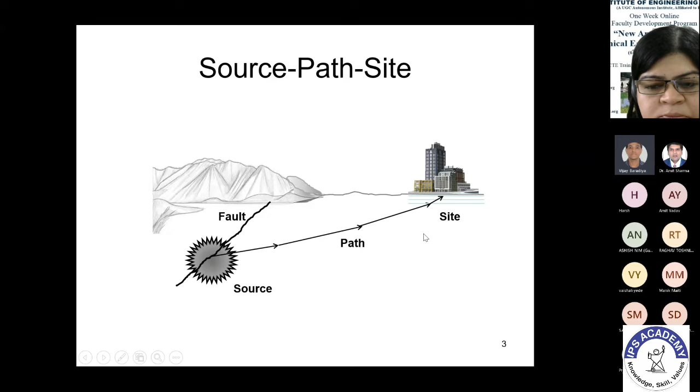Because after that, the overburden will take care of it. So in these local soils, how does the wave get altered? I have source characteristics, path characteristics, and site characteristics. So I have to quantify each one as the wave passes through three different materials. That's what we are going to discuss.

Structures, or whatever you call the built environment, any kind of thing. So let's consider this: assuming 30 kilometers below the ground surface, I have some earthquake or fault rupture, and because of that fault rupture...

Because of that fault rupture, seismic waves are generated, and then those waves pass through and reach the bedrock below the facility, below the structure, and then they move towards the soil, where they have a lot of interaction.

So here, this is the ground response at the bedrock. Whenever there is an earthquake, from the instrumentation or seismographs, we get this ground motion, because most instruments are installed on bedrock. So we get this acceleration or time history at the bedrock, and then we have to bring this to the surface. For that, I need the complete dynamic properties of my substrate.

It also says that even in seismic zone 3 and above, we have to carry out dynamic tests, including MASW, which has become compulsory. When you do this, you get the complete characteristics of your strata.

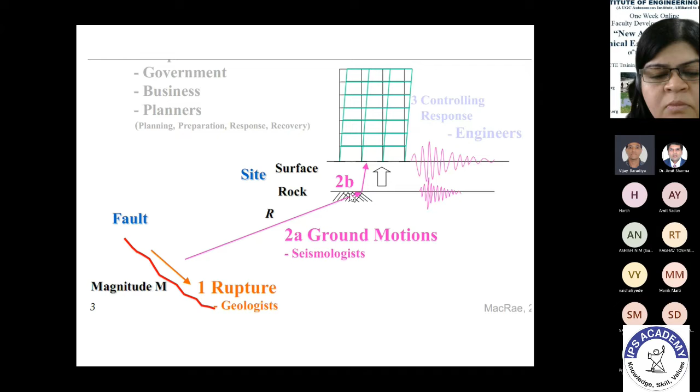As you know, our microzonation map has 4 zones - 2, 3, 4, and 5 - with different levels of risk.

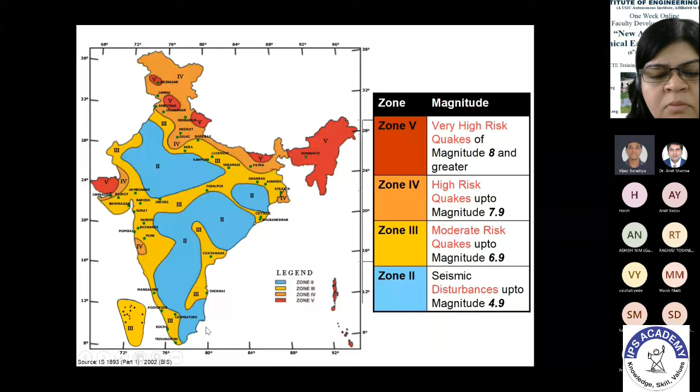This is actually at a macro scale, considering mostly the seismotectonic and geological settings, but not the geotechnical characteristics. So this can be taken only as a base thing, not as a Bible that you go with, because I've given the example of Delhi itself.

As I said, when you have a seismic source passing through, obviously there is the topographic effect. In past case histories, especially during the Nepal earthquake, in the Kathmandu Valley, we saw much higher damage compared to the portions on the hilltop, etc.

This is only because of the topographic effect - the crest part or the depression part, etc. Even the wave has to change with the topography, which we are not considering in this one, which we call local site effects.

If time permits, I'll cover this also today. So primary topographic effects - if you have a complete homogeneous soil, the ground response analysis may be an easier thing, in the sense it will be in a kind of resonance frequency type, using very simple equations.

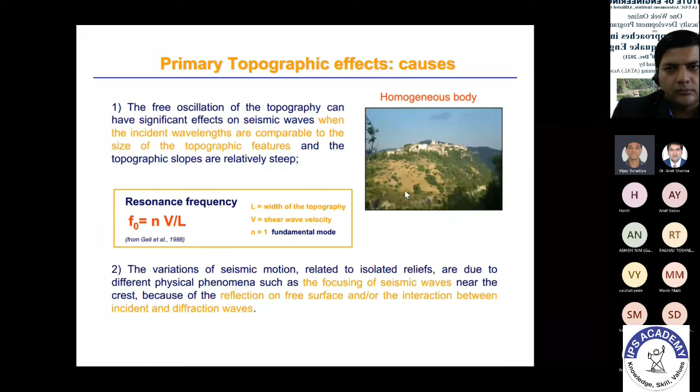Another thing is, with the topography effect, we have another important factor to consider, which is the geometrical factors, which we have to incorporate when we do the ground response analysis.

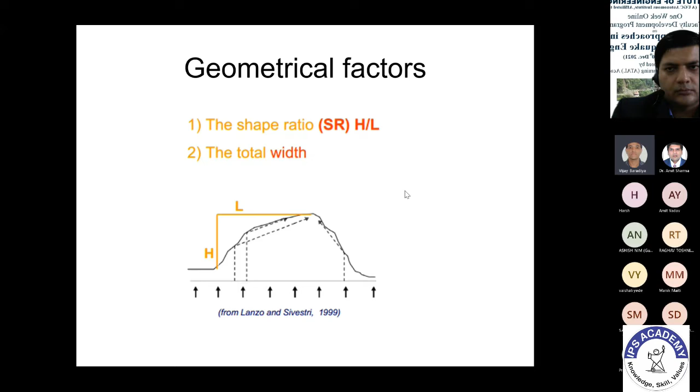Before starting my actual talk, I would like to show you some of the past damages and how they can be quantified, in terms of damage intensity and also the pattern part of it.

Let's see - again taking the example of Delhi. If it's South Delhi, we have a facility sitting mostly on the outcrop, so you find rock. Whereas if it's Eastern Delhi or parts of Central Delhi, you have thick alluvium, and the facility may be sitting on soil.

So why is this? Because the soil is highly site specific. If you want to design for a particular site, you have to understand the behavior of the soil at that particular location. So this is a completely site specific study.

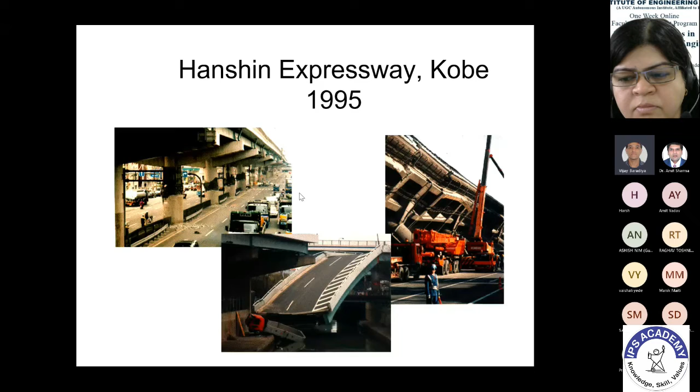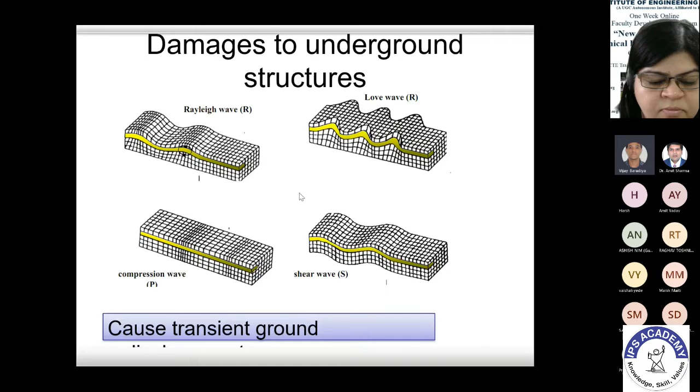Similarly, for underground structures—right now even the Government of India has a lot of ambitious plans for underground tunnels, etc. How do these damages happen?

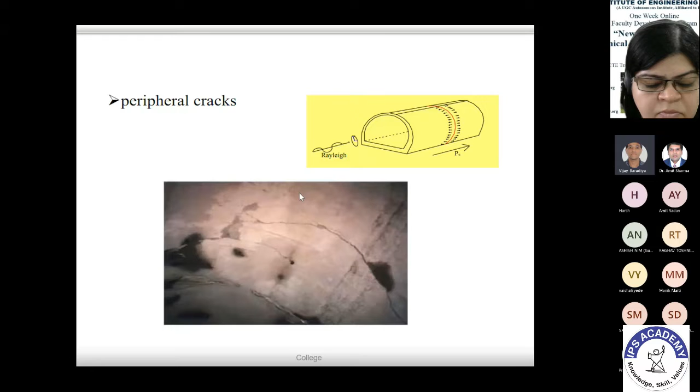I'll show you some photographs, so you can see peripheral cracks. During the Sikkim earthquake, so many Tista projects—their underground caverns, especially the transformer cavern and powerhouse caverns—had completely collapsed. In a few of the caverns, people were working, so men and machinery were lost. It was such a big disaster that happened in several Tista projects.

You can see here the spalling of the concrete, and longitudinal cracks can also develop. This happens when you have wave propagation effects—the direction of wave propagation also matters. All tunnels, especially in the Tista projects—Tista 2, Tista 3, Tista 4, etc.—the damage was not uniform in pattern or intensity.

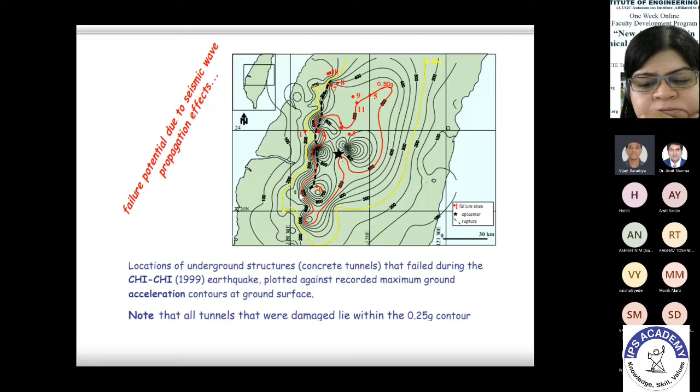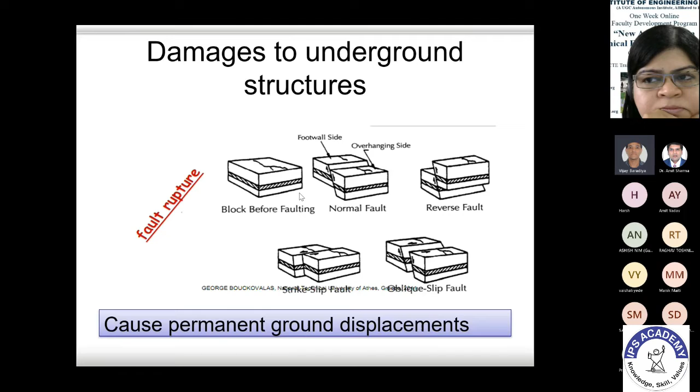This depends highly on the topographical effect and also on local site characteristics. Of course, the damage to underground structures also depends on the rupture mechanism, whether it's a reverse fault mechanism or strike slip fault, etc.

Another hazard we have to handle is liquefaction. I had one interesting consultancy project—it was actually a flyover bridge. They started sometime back in 2014 and designed everything, and started construction as well. But there was a query of liquefaction because it was in seismic zone 4, and since that came out, they wanted to redo the analysis.

When they did the analysis again, yes, it was liquefaction prone. So mitigation measures had to be considered, and the project was delayed for more than 4 years because of this process. Liquefaction is one of the very interesting and complex phenomena we observe, especially during earthquakes.

What happens is the soil behaves like a viscous fluid. Can we imagine standing on such material? No, right? Because it doesn't have any shear strength—it loses shear strength for some time, and then regains it. During this process, your structure may fail completely.

You don't mind if it regains strength after a couple of minutes, but how does that help you? It already liquefied. You can see here there's no fine crack on the superstructure, but it has collapsed. So these are the geotechnical hazards.

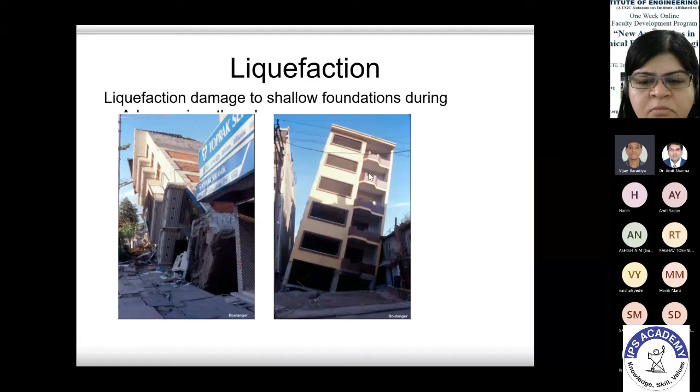Some of the port structures also, I think tomorrow my student will give you a talk on port structures. So Swati, I don't want to do that.

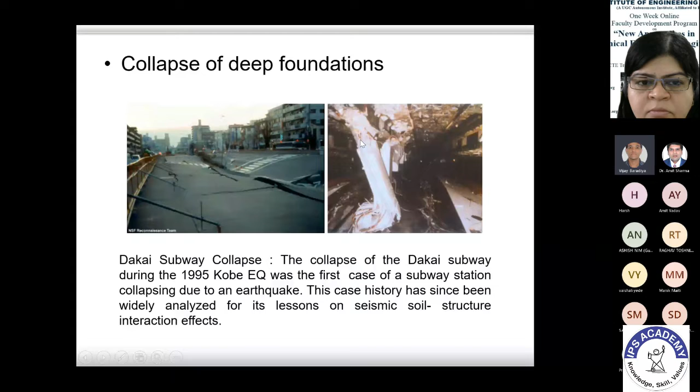When the soil around the pile has washed out, how do we transfer the load? You can see here, this is between the connections, and these are the piles, how they damage. They are now columns. What happened to the embedded soil? It has been washed out because of the lateral spreading.

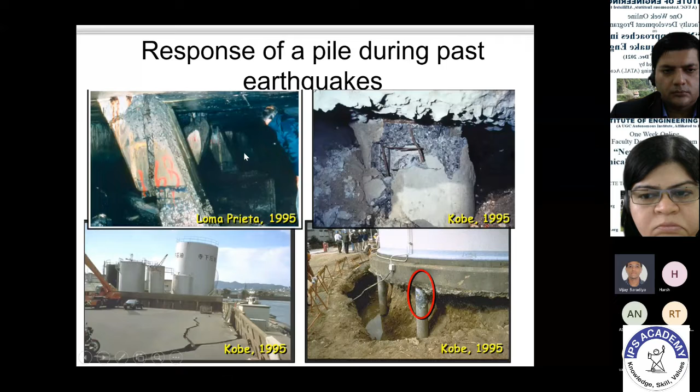Retaining walls, you take any structure, and this is during the Uttarkashi earthquake in 1991. You can see the failures.

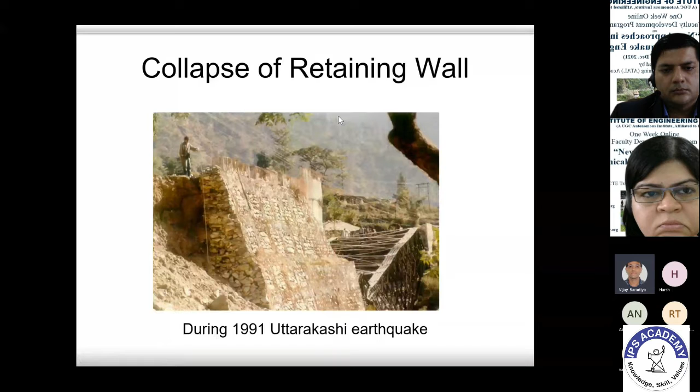So with this, let's see how to quantify that, considering the path effects and also the site effects. For that, you have to carry out the ground response analysis.

First is to quantify the source effects - obviously the rupture mechanism, the type of earthquake, how the earthquake happened, all these things come under the rupture mechanism, the source mechanism. Mostly this is the easiest part. You can get it just after an earthquake or even before an earthquake, since seismologists do a lot of work on such kind of things.

Then the second one is path effects, when a wave is passing through the material, because seismic waves pass for kilometers. When the Bhuj earthquake happened in the Kutch region, it passed through up to Ahmedabad. Ahmedabad had severe damage when compared to the Bhuj region, which is near the epicenter. So why do you think so? Because when a wave is passing through for a longer distance, the energy should die, right?

The laws of physics - but here the laws of physics doesn't apply, because the wave gains energy when it's passing through loose sediments. Ahmedabad, which is almost 200 kilometers away from the epicenter, experienced more damage to buildings than those near the epicenter. This is completely against the laws of physics, so that's where we have to be more focused. Why? Because when a wave passes through loose sediments, it amplifies, which is called soil amplification, and you have to evaluate that too.

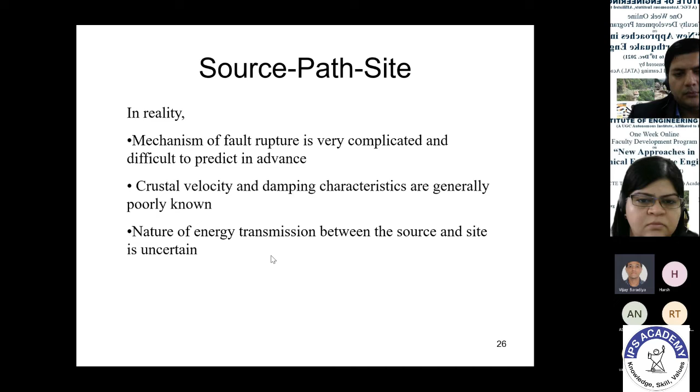So in reality, the mechanism of this fault rupture is complicated, but it's not our cup of tea because it's mostly the seismologist's part. But we may need some parameters from them, like the crustal velocity and damping characteristics, when we want to do the remaining part of the ground response analysis.

Another thing is hazard - I'm not talking about hazard evaluation because it's mostly clear. Most people do this even in industry when doing seismic design. It can be done through deterministic approach or probabilistic approach, depending upon the importance factor. For a nuclear power plant, we do deterministic approach, but probabilistic approach can consider more uncertainties and predict the actual behavior or hazard.

So once you do the hazard analysis, we can develop our own attenuation relationship to predict the ground motion parameters. Once you have that, then you have to do the ground response analysis considering the detailed geotechnical parameters.

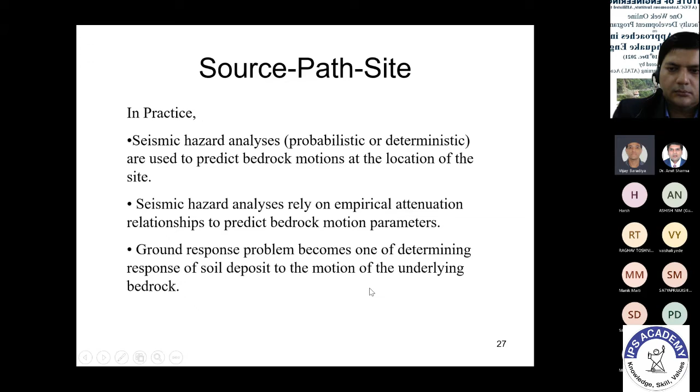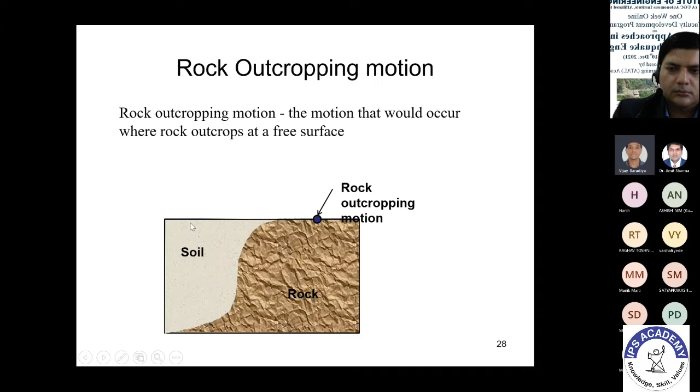This is like - I have bedrock somewhere, assuming a few kilometers, 100 kilometers, and I know the ground motion here. When I have an outcrop ground motion, like rock up to the surface, as in the case of South Delhi, mostly in rock you behave like mostly elastic. So there won't be much change in the ground motion - I can consider the bedrock motion as outcrop motion, maybe the same. But how to bring this to this level is the thing which we are going to do now.

For ground response analysis, we generally use it to predict the surface motion, the surface characteristics of the wave, because that is the characteristic of the wave which is going to hit the superstructure facility. So to predict the ground surface motion, especially if you want to design something, develop the response spectra, evaluate dynamic stresses and strains for liquefaction sort of geotechnical hazards common on soft soils, and to determine earthquake induced forces which can lead to instability, especially for retaining structures.

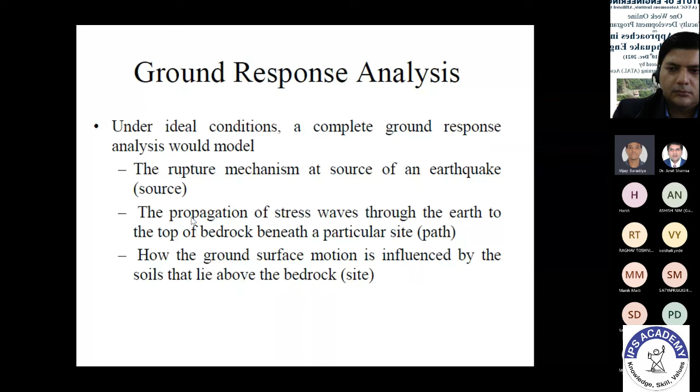For ideal conditions, this analysis would model source characteristics, path characteristics, and site characteristics. We have to have all three. I'll just skip this part, as that is the physics side of it.

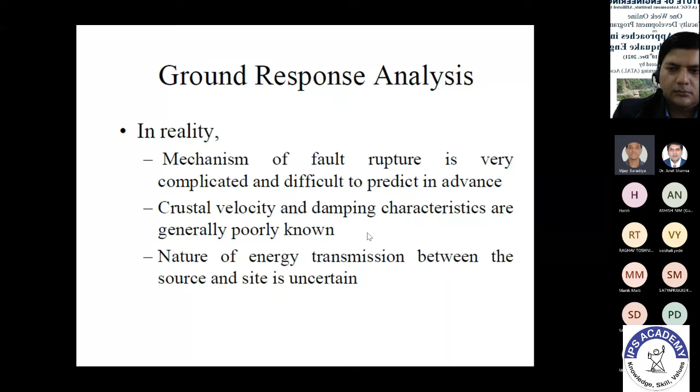In reality, the source character, as I already explained, the bedrock ground motion and the outcrop ground motions, we consider uniform because of the elastic behavior of the rock. But rocks are not completely elastic. If they're highly disintegrated, highly fractured, or weathered, they're not completely elastic, but intact rocks mostly will be elastic in behavior.

In practice, whether you do it probabilistically or deterministically, up to bedrock you can get the characteristics of the ground motion, which we generally quantify in terms of peak ground acceleration. So when I do my hazard analysis, either considering the probabilistic or deterministic way, I get my PGA at the bedrock.

After that, I have to carry out my ground response analysis, which many people, even in industry, are ignoring. They think that after hazard estimation, whatever ground acceleration they got at bedrock, they are going to use for the design directly. Then you are not considering the effect of wave propagation in the soil on which your structure is sitting. That is one of the biggest problems at present. That's the reason why I'm giving this particular talk now.

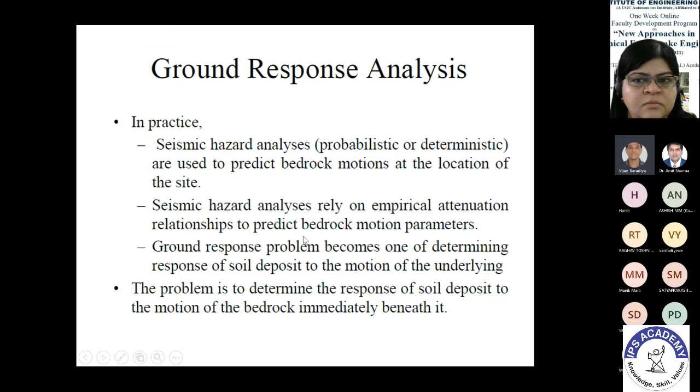So ground response analysis is something very, very crucial, so that you can quantify the hazard in a more site-specific way. There are different ways of doing it as well.

First we have to predict ground motions like time history or response spectra. Then you have to evaluate the stresses and strains for liquefaction hazard, and of course know the foundation loading, and the failure or ground failure potential for instability evaluation for retaining structures and their response.

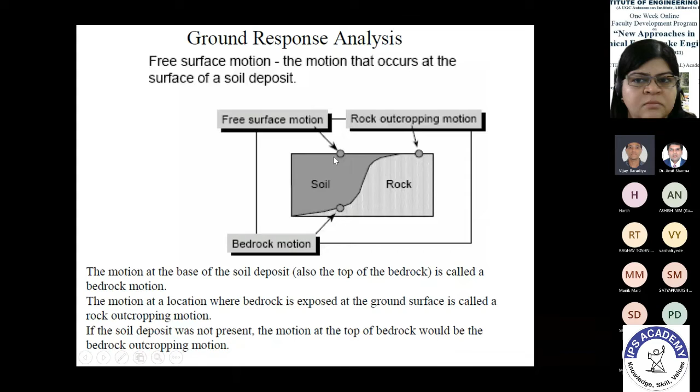So these are the terms which we will be using: this is the bedrock motion, this is the outcrop motion, and this is the ground motion or surface motion. These are the terms I'll use from now on. Mostly bedrock and outcrop motions we consider the same, and this is the important parameter for me to decide if it is sitting on the soil.

If you know this is measured from instrumented data, that means the bedrock motion is known, or even from hazard analysis. Since I'm assuming this material is elastic, this is also known because it's the same, and only the unknown part is the surface motion.

In some cases, NGRI and the Ministry of Earth Sciences install a lot of instrumentation, seismograph stations, at different parts of the country, and for quite a long time they've had a very strong network. Mostly the instruments, they prefer to keep on the rock. So if you have very shallow depth and some rock is there, they excavate and put the station types, and then they instrument that. If they could not find it, they put it on the surface.

When they put it on the surface, it will give you the surface ground motions. And when you have the surface ground motions, you can do back calculations to get the bedrock part. Since this thickness is like 100 or 200 meters, you cannot do excavation for such a deep depth and put your instrument there. So instead, we have the surface station so that you can measure the surface ground acceleration, and since you know this, you go back. So this is possible also.

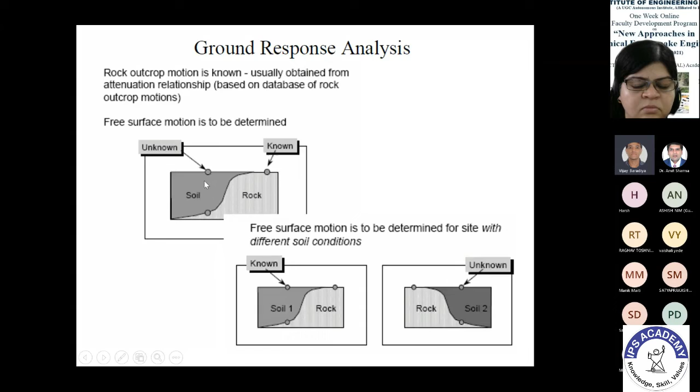Based upon the type of location of the instrument that we do.

Let me explain how to do this ground response analysis or site response analysis. It has basically two steps.

One is the detailed modeling of the soil profile, because soil is layered and each layer has different dynamic soil properties, and its thickness varies. So I'll consider the shear velocity, the dynamic or shear modulus, and the thickness of each layer.

The first step is modeling of the soil parameters, since the soil is stratified. As I said, I need the dynamic soil properties, shear modulus and damping characteristics. So we can carry this out, right?

We can calculate this - you do an MASW test, you get shear velocity, and with density, I can calculate G. Once I have this, of course I can get the damping too. So I have the soil models for shear modulus and damping characteristics of each kind of soil, and I know the thickness.

So then we can carry out either one dimensional, two dimensional, or three dimensional analysis, based upon the importance of that particular facility. Mostly people do one dimensional, because in most cases the difference is not that much, but for very important structures, we tend to do even three-dimensional analysis as well.

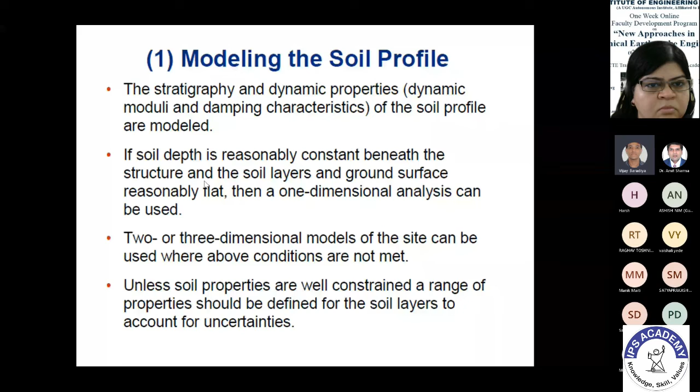Then calculating the top of profile motions - how do we do this? Typically, bedrock motion is given. So I go from bedrock upward. If the bedrock location is unknown, some locations we don't know exactly where the bedrock is, because we cannot drill boreholes to find out the bedrock.

Even if you do refraction studies to find out the bedrock ground motion, we may not be able to find the actual bedrock. Maybe we can get the engineering bedrock instead. Engineering bedrock is this - if you go there and excavate, you see it may not be rock, actually it may be soil, but behaviorally it behaves like a rock.

When the material is highly consolidated and very strong, very compact, it may behave like a rock. As per NEHRP classification, if the shear velocity is more than 760 meters per second, we consider that material as behaving like bedrock, which we call engineering bedrock. Actually it may not be rock at all, but it behaves like a rock, so for us, our problem is solved.

So the location of this engineering bedrock - even if you don't have the actual bedrock depth, if you have detailed dynamic soil properties of all the layers up to your engineering bedrock, then what you have to do is find out the response at each and every layer.

For doing that analysis, we can do linear analysis, quarter wavelength approximations, equivalent linear approach, or non-linear approach. I'll explain equivalent linear analysis now, and these are the methods we use. Non-linear analysis is done for facilities like nuclear power plants or very important facilities where the risk level is higher.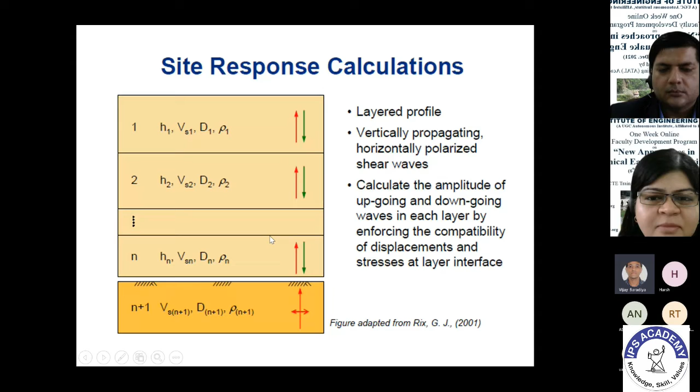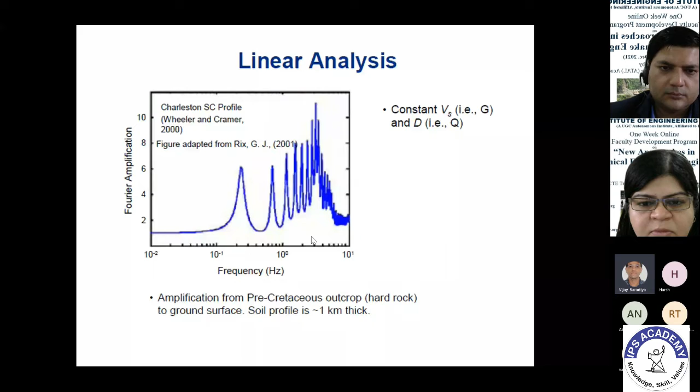So whatever comes at the surface, I'll be taking that. In the linear analysis, that Fourier amplification we can calculate. This is actually for one of the sites, which is at a hard rock site - this is what I'll be explaining to you.

Equivalent linear analysis is very common. Most people use commercial software like Shake or ProShake. What it exactly does is start with knowing the G value and damping value, and linear response analysis for each layer it will calculate, and then it will also check the consistency with effective strains. If it is there, it's fine - it gives you the output like this, and if not, it will again go and do the same trials again.

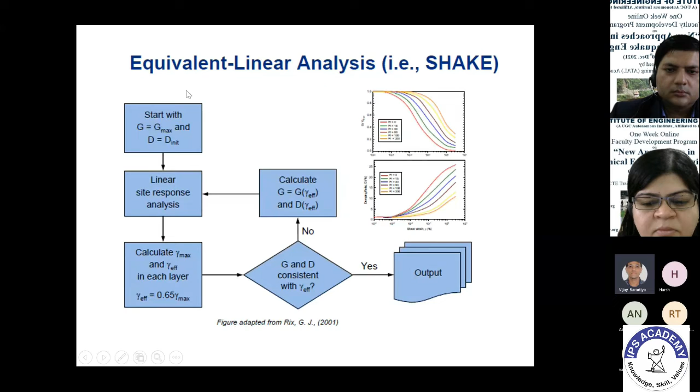With different materials, if a structure is sitting on rock versus soft soils, it matters. Generally rock is considered more elastic, and there won't be much change in the ground response characteristics. Whereas if you see the same thing with linear and equivalent linear approaches, these are response spectra differences.

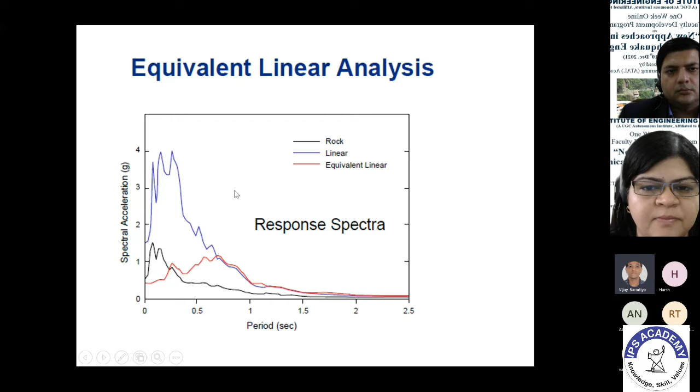If you want to take the nonlinear aspects of the soil, we do have nonlinear inelastic characteristics, including plasticity effects and pore pressure generation details. We can do nonlinear or dynamic tests in the laboratory, like resonant column or cyclic simple shear, etc. And we do have some programs, though these are a bit costly, like FLAC or Dynaflow, etc.

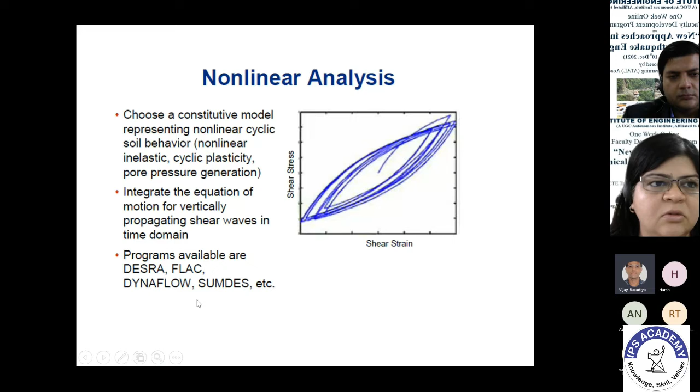So let's see what change we get from equivalent linear versus nonlinear analysis. Nonlinear analysis needs a very robust constitutive model, which may require a lot of data, which you have to get either from laboratory resonant column tests or extensive field tests.

Whereas in nonlinear, it assumes some sort of nonlinear models, considered in terms of effective stress, so that it can model the generation of excess pore water pressure. So whatever approach for ground response analysis, whether equivalent linear or purely nonlinear, depends upon the type of facility.

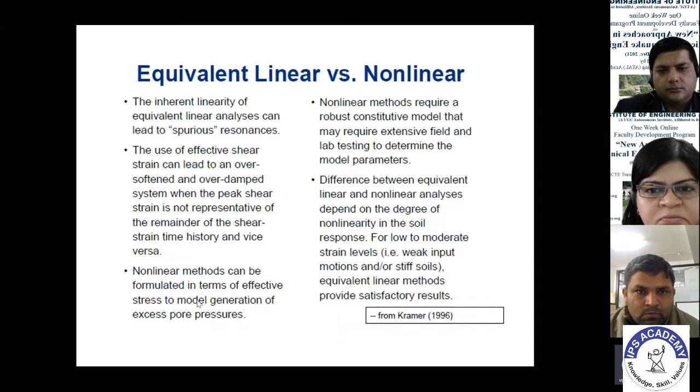So let me explain the one-dimensional equivalent linear method. This is widely used for several infrastructure projects, so that's why I'm taking it up.

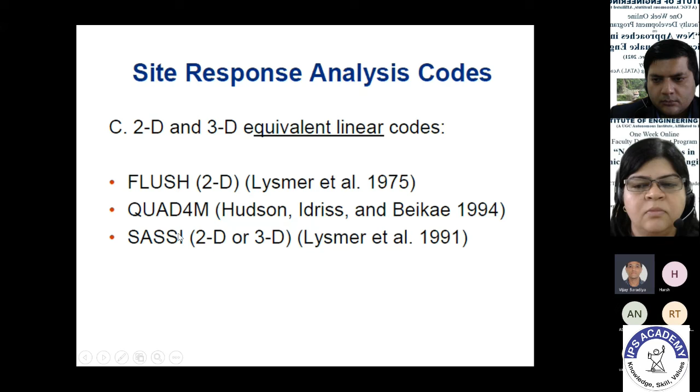Nonlinear models, as I said, come in different kinds. There are two-dimensional and three-dimensional equivalent linear models, also SASSI, which can take care of these things, but of course these are very costly - only a few companies can afford to buy or use this. We do have our own code which can do similar things to SASSI. If possible, I'll go to the section where we've done soil structure interaction for piled raft structures.

To incorporate all this, I have to understand the SSI effects, or more specifically DSSI analysis - dynamic soil structure interaction effects - where I need to have the exact ground motion characteristics at the free field, that is at the surface, so that I can use that as an input when designing my superstructure.

Structures respond differently when supported on soft soils, because it depends upon the overall interaction effects - it behaves like a system. You have soil, substructure, and superstructure, and all three have different material properties and different fundamental frequencies. Soil has a different fundamental frequency, the earthquake has a different frequency, and my superstructure with the foundation considered as one unit has a different fundamental frequency. When these three different things combine, I may end up with resonant effects also, so all this has to be evaluated during my analysis when doing seismic design.

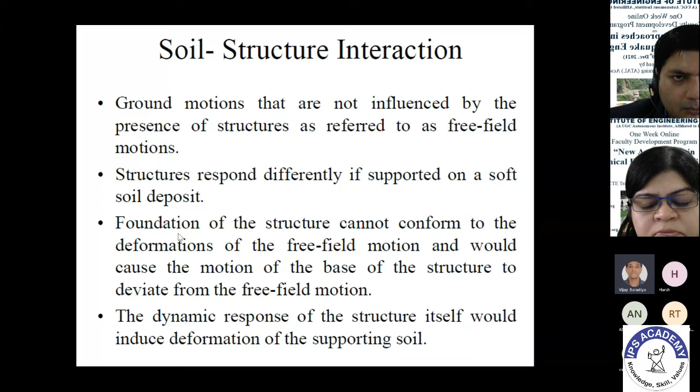The dynamic response of such a structure itself would induce deformations, because it's a complete system. I need to understand the overall displacements or stresses in my superstructure at different nodes, which can be evaluated if I do a detailed dynamic soil structure interaction analysis.

So this process where you find out the response of every element at different nodes, we have to evaluate so that we can understand its significance, to know whether my particular facility is behaving fine or not. Let me tell you one more thing.

There is always a question like, can't we design earthquake resistant structures? If a facility is designed for magnitude 7 or 7.5, and you get a 7.7 earthquake, obviously your facility may not perform. Or if you designed it for a seismic event of duration x, and the actual duration is x plus delta x, again your facility may get damaged. Earthquake is such a complex phenomenon, it doesn't only depend on magnitude.

It has different parameters which have influence, including amplitude parameters like acceleration, frequency parameters, and time or duration parameters. So you cannot design for such varied parameters. If you try, the cost of the facility goes up.

If you design for an earthquake scenario that never happened before, that's a complete waste of money. So rather than this, base isolation or some kind of shock absorbing system has to be designed. That may be the better way when you really want a resilient infrastructure.

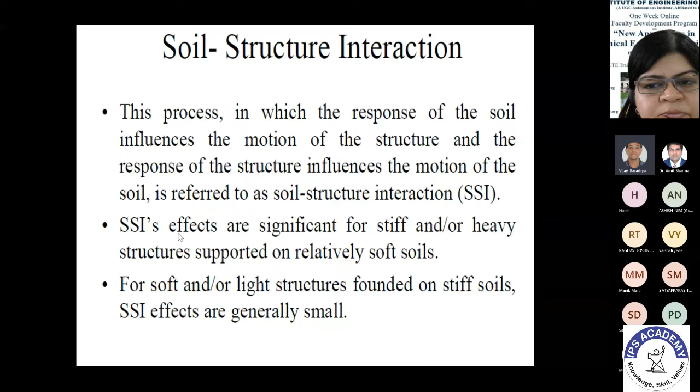During ground motion analysis, the soil behaves like a filter, altering the input ground motions and changing its characteristics. The frequency content will change, and since each soil layer has different ground motion characteristics, this complicates the issue.

Because of this, if there is de-amplification of accelerations or site effects, we are happy. But if there is amplification of the input ground motion from bedrock to the surface, that's a problem.

In Delhi, when we did the analysis, we observed the amplification ratio was even approaching 2.2 in eastern Delhi. That means at the bedrock you have acceleration of some x, and at the surface in some regions of Noida it's going up to 2.2 times x. So you cannot take x as your design characteristic for seismic design.

You have to actually calculate the site specific amplification factor and use that parameter when doing the seismic design. And also duration—if you design a facility for duration x, and x plus delta x comes instead, it may fail.

Let me tell you about site amplification, one of the important quantifications we do in ground response analysis. I have a bedrock acceleration like this. When I bring that to the surface using equivalent linear analysis, I get this acceleration. So B over A gives me the amplification factor.

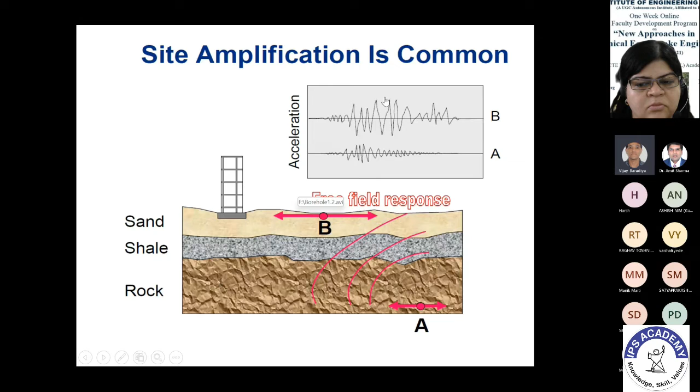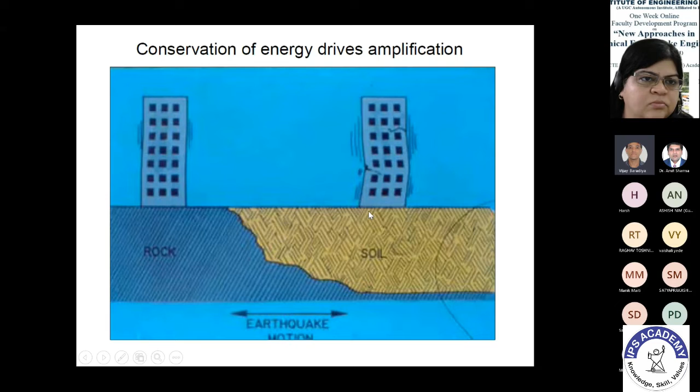Because the soil is more loose, it can amplify the seismic wave. If the input ground motion is x on the rock, where it is mostly elastic, it may become around 2x at the surface—then your facility designed with the same parameters will not work. That's what happened here too.

So how do we compute that amplification? Looking again at the figure with bedrock ground motion, outcrop ground motion, and surface ground motion: amplification is the ground motion at a point divided by the bedrock motion, or free surface divided by outcrop. Since rock behaves elastically, the amplification there is often close to 1, so outcrop motion roughly equals bedrock motion. But at the surface it's different, because the soil alters it, acting as a filter.

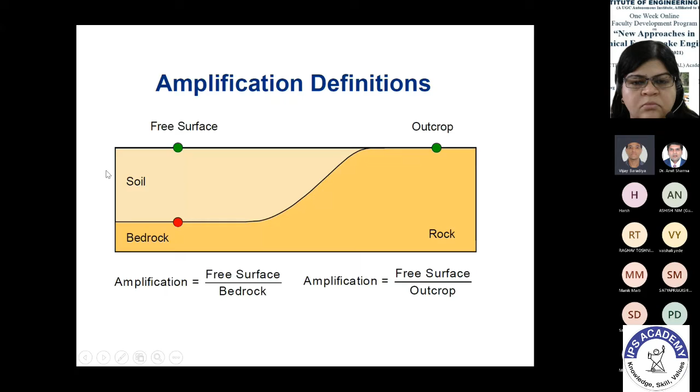Let me show you some examples using Degtra. It was initially in Spanish, so you'll see the interface in Spanish. Beta is the shear wave velocity, gamma is the unit weight, and there's damping and thickness for each layer. You have to give some input ground motion—let's assume we used the Bhuj earthquake ground motion—and these are some measured properties at Delhi, though I don't remember exactly which part of Delhi.

So shear wave velocity has been measured through MASW. Of course, damping we have assumed 5% because it's not easy, since damping in lateral direction is different than damping in vertical direction, which we will be evaluating with proper field tests, especially when doing power plant sort of things. Whereas for normal structures, you can consider both horizontal and vertical damping. It's not like structural damping—you can even have 20% also.

So here, this is somewhere in Vasant Kunj in South Delhi, which is sitting on the rock outcrop. So this is actually the input ground motion, A, and this is at B. Mostly when we divided B by A, our spectra was almost flat, so it is almost like one.

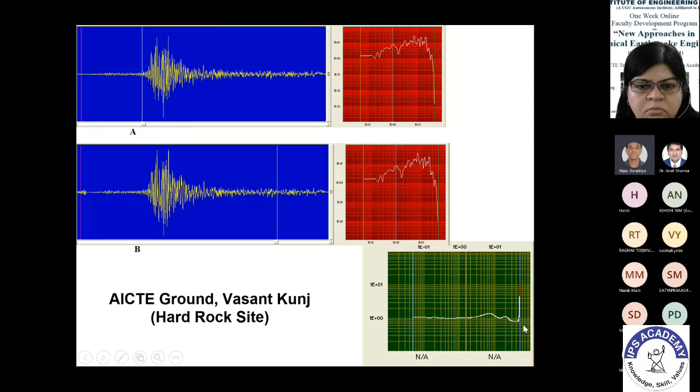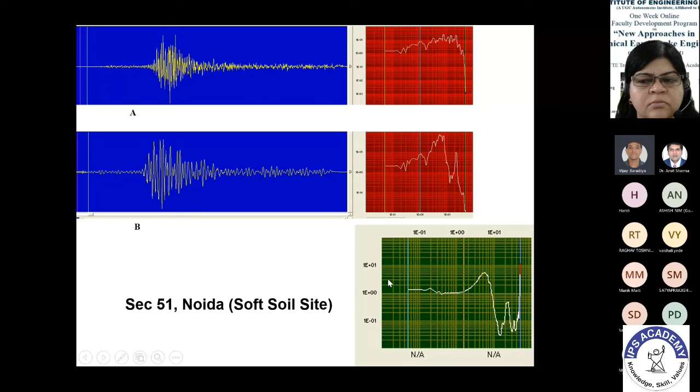I'll show you the one at Sector 51, Noida. This is the input ground motion at the rock, and this is the surface ground motion at the surface of the soil. B by A gives me the amplification factor, and you can see here it's something like almost 1.8. So we have developed that—this is actually part of my PhD as well.

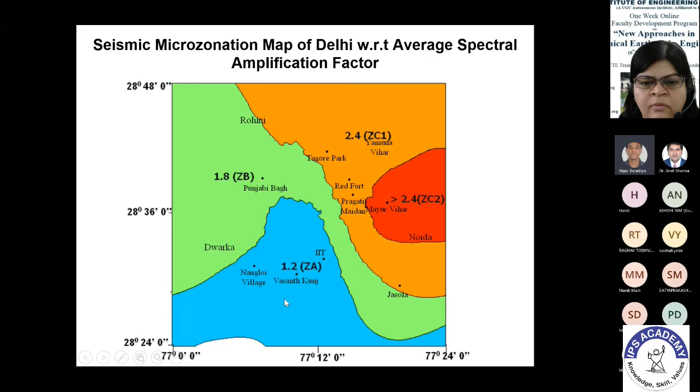So this is the amplification factor map which we developed for Delhi. At different locations, since we considered 180 locations, we did MASW and got a lot of site specific geotechnical data. In South Delhi, amplification factors are not more than 1.2, whereas Western Delhi it's between 1.2 and 1.8, whereas in Eastern Delhi where you have Yamuna Vihar, Pragati Nagar, Pragati Maidan, Mayur Vihar, etc., Noida—mostly the very costly areas these days—it was ranging from 1.8 to 2.4. The maximum we got was 2.4. So if input ground motion is some x acceleration, it will be 2.4x maximum. You cannot design the facility the same here or here or here—the hazard is very site specific.

Generally, the piles in such areas where you have amplification, higher amplification, or liquefaction hazards—what we do is go for deep foundations, and piles are very common. These days people are coming up with the pile raft, because Terminal 3 of Delhi Airport is on pile raft, whereas Terminal 1 is on pile foundation. A huge amount of money has been saved because of adoption of the pile raft foundation system in Terminal 3. I won't go into detail, but piles generally can take care of the forces because of this kind of movement, the inertial forces, taking care of the amplification and liquefaction issues.

So what exactly do we consider when we design a facility? We have seismic forces, inertial forces, and because of any geotechnical hazard, we also have soil failures like liquefaction. To address this, after detailed ground response analysis, we have to adopt soil structure interaction. People think it's a myth in the industry that it's a very robust or complex approach, or that it's costly and makes the design costlier—but these are also myths, because it can even reduce the cost. What we're trying to do is quantify the exact hazard. When you quantify the exact hazard, the cost may be underestimated or overestimated, whatever it is, but it will give you the exact evaluation, so that will be safer for my design.

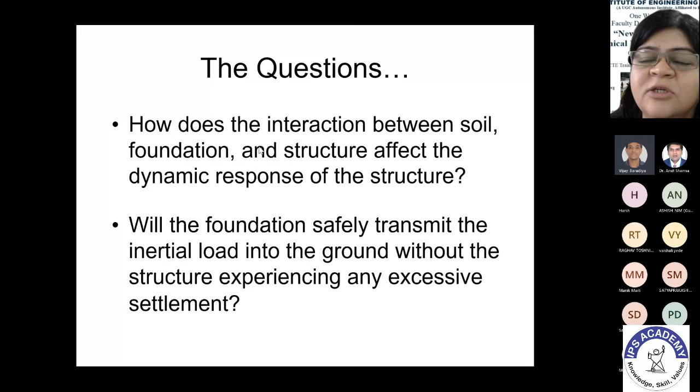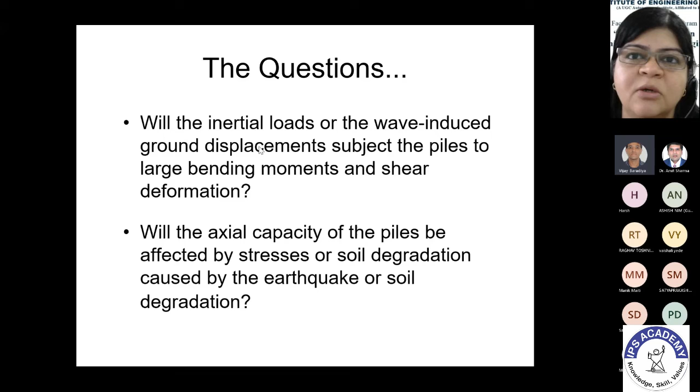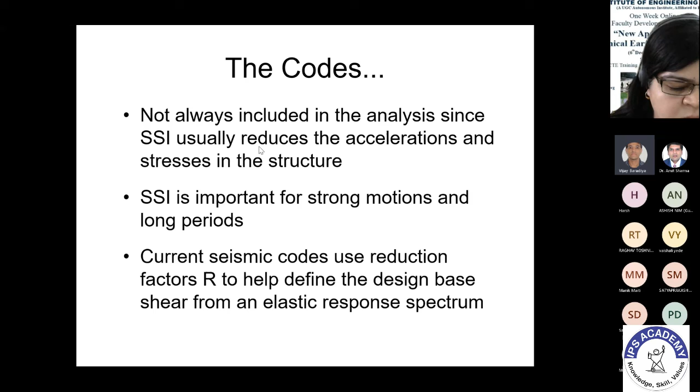So with these questions, let's see what the code says. We do have seismic codes, but they are more generic, with guidelines only. The code doesn't always include this analysis since SSI usually reduces the accelerations and stresses in the structure. It's important for strong motions, especially when designing facilities in seismic zone 4 and above. Current seismic codes use a reduction factor to define the design base shear from the elastic response spectrum. Current building provisions use a fundamental vibration period multiplied by a period lengthening ratio R, which depends on the lateral stiffness of the structure, stiffness of the foundation, the soil, and of course its height. These are our current standards.

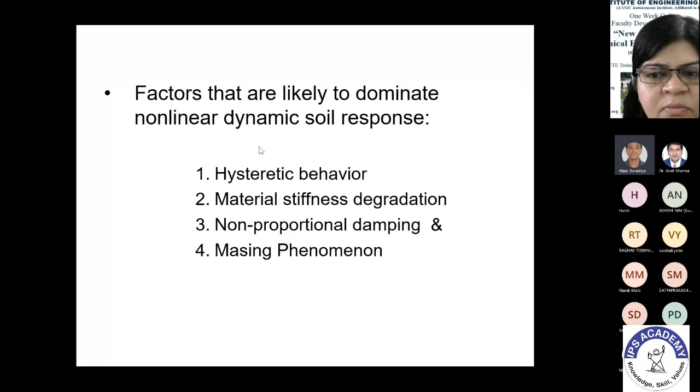So which factors dominate the nonlinear dynamic soil response? As I showed you with the stress-strain curve: hysteresis behavior, stiffness degradation, non-proportional damping (as I said, lateral damping is not equal to vertical damping, so it's highly non-proportional), and of course the Masing phenomena. These are the four factors that generally dominate the nonlinear dynamic soil response.

To account for that, we do SSI analysis. For doing SSI analysis, we have different techniques in the literature: continuum or discrete models, direct approach or substructure approach (which people mostly use), two-dimensional or three-dimensional depending on the type of problem or facility, time domain versus frequency domain, and linear versus nonlinear solutions. I'll explain each technique quickly so I can complete the ground response analysis.

Actually this is like one whole chapter in a Geotechnical Engineering course, which I'm trying to cover in 1.5 hours. So continuum versus discrete basically lies in how you do the numerical formulations, and you mostly get similar results, but the difference comes in the spatial interpolation, the size of the mesh we consider, or the time stepping. The discrete approach is mostly for heterogeneous conditions laterally and vertically.

So we can use FEM, or people also go for DEM these days. Direct approach and substructure approach - I generally do the direct approach. In the direct approach, we model everything together: two-dimensional or three-dimensional soil, substructure, superstructure, everything considered as one system. In the substructure approach, first people model the soil part embedded with the substructure, and whatever response comes from that, they apply it to the superstructure part.

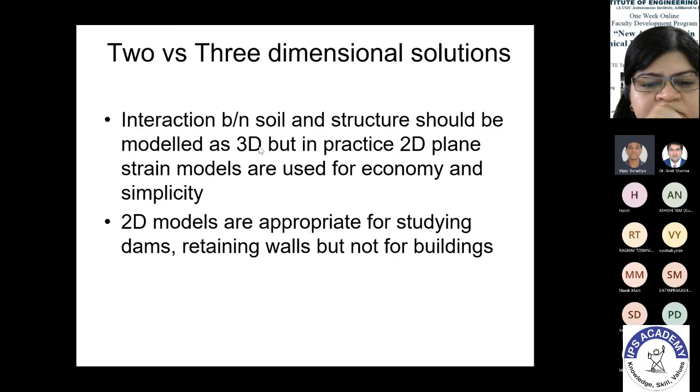Two-dimensional versus three-dimensional depends on the type of problem - if it's a retaining wall, then two-dimensional analysis is fine. So it depends on what kind of facility you're working on. Time domain versus frequency domain depends on whether you're working in the Fourier domain due to frequency dependency of the foundation stiffness, or if the problem involves nonlinear material behavior - normally we solve it in time domain.

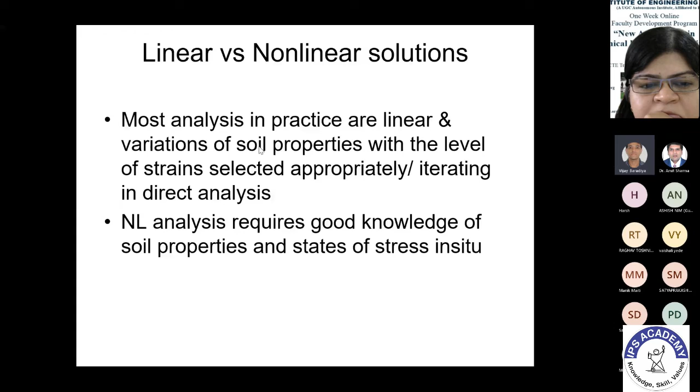So linear versus nonlinear solutions - most analyses in general use linear variation of soil properties with level, because it's simpler than the nonlinear part. If you use soil constitutive models and nonlinear soil models, then we can incorporate that, but for that you need a lot of information about dynamic soil property behavior. As I said, you have to do dynamic soil tests like resonant column tests in the lab, or field dynamic tests, so that you can get the complete nonlinear soil properties and then incorporate them.

So what are we assuming? In all these analyses, the basic assumption is that the seismic wave is propagating vertically upward, but it can actually come from any direction.

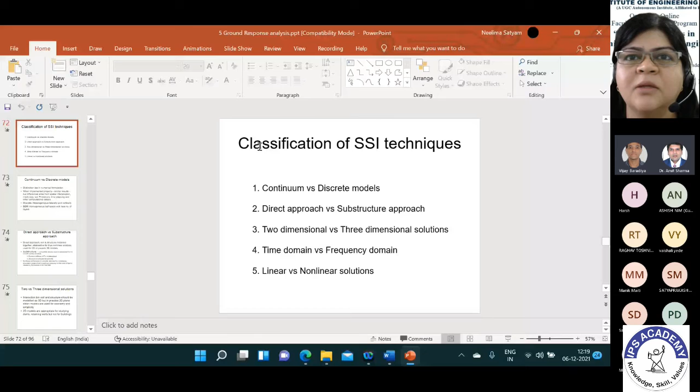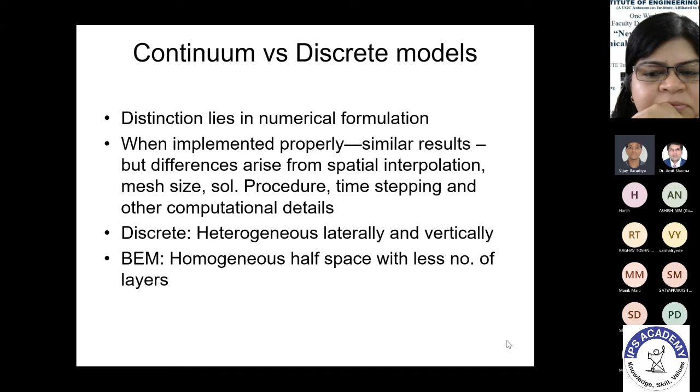So these are the assumptions which we do in SSI analysis or DSSI analysis. We consider that the seismic wave is hitting vertically above, but it can come in any direction, with any angle of incidence. So it's not coming vertically and hitting your foundation. That is a basic assumption. Some very little literature has been done on this, if anybody is interested, this is one good problem to solve.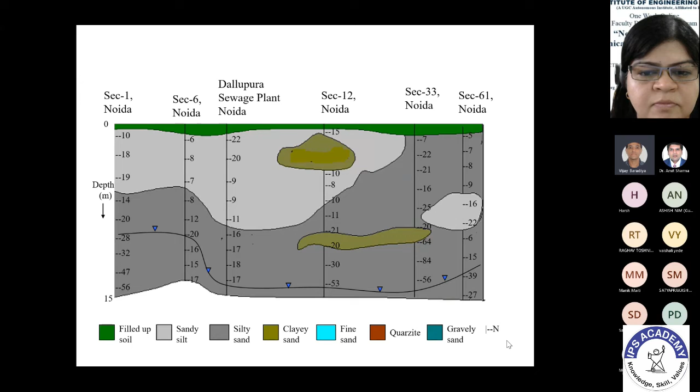And we consider soil is layered. I'll show you some of the two-dimensional soil profiles in Delhi which we prepared. Soil is not like a layered like we assume, it's highly heterogeneous. In between you have a kind of capsule kind of clay formation, or you have a big boulder. So soil is not completely layered, but we make this assumption because of simplicity in calculations, and linearized non-linear soil models generally assume that. So this is how the soil profiles for Delhi look in some regions, this is in some eastern part in Delhi, sector 1 to 61. So where is it layered? It's not layered, it's highly heterogeneous.

So then coming to the sources of uncertainty. The first one is with respect to the nonlinear soil behavior, so you have to do a lot of dynamic soil properties tests, and then as-built structural properties. The structural material is a continuous material, I don't see much variation with the material properties, it's just concrete or steel. So what is that big thing that it has in terms of properties or variation? The dimensions and the elastic properties are not exactly known at the design stage, but a model is used to reproduce the structure when doing the SSI analysis. And numerical solutions, computational algorithms are not always clearly described, especially when you use any kind of software.

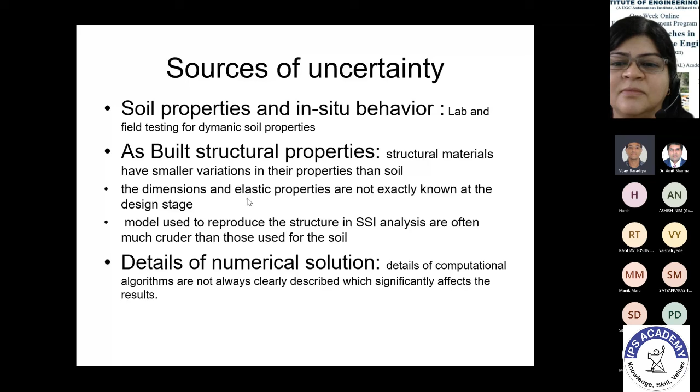So I can say that my first PhD student worked on dynamic soil structure interaction of a pile raft foundation for an asymmetrical building. If Amit allows me, then I can talk on that aspect, because that particular research problem considered most of the things which we discussed here in today's class. Yes ma'am, is it an expensive analysis? I'll talk on that tomorrow, no problem, okay that will be fine ma'am.

So the last question many people in the industry ask is, is it a very expensive analysis to do? So I say that it is not expensive, but it's very important, rather it's like your health insurance. What we do is we do insurance for everything, but not for our structures. So it's like health insurance.

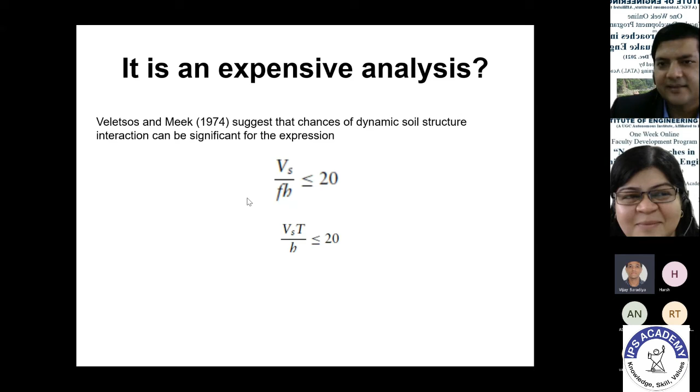So we need to characterize the soil basically for its dynamic soil properties, and then we can use that for nonlinear soil property analysis or ground response analysis. So this is how I'm giving you some guidelines to do this. From the codal provisions as well, taking the story ratio and shear wave elastic characteristics etc., considering that you can calculate whether it is required or not for a given location for the given facility, in terms of the structural properties, its material characteristics, and the dynamic soil properties.

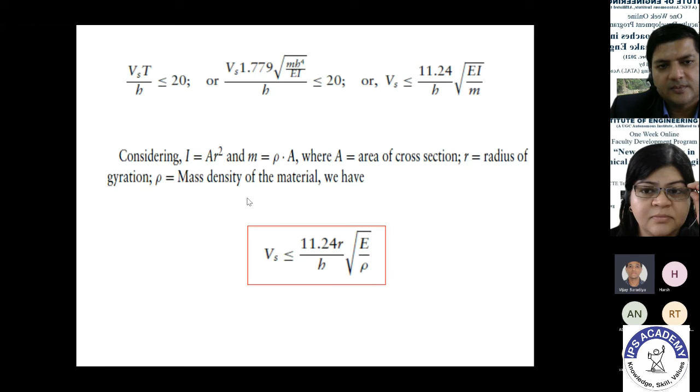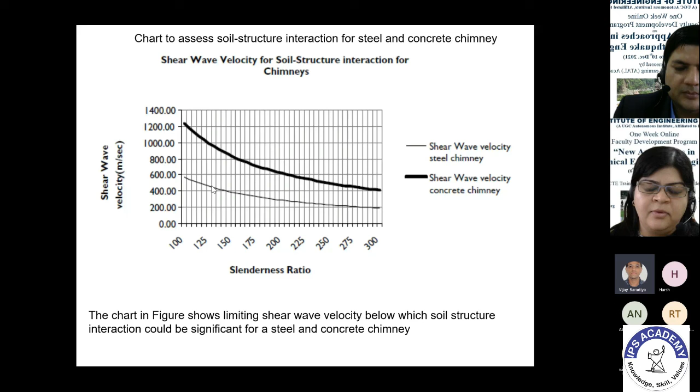Similarly, for concrete structures, if the shear wave velocity at the site is less than this, based on that you can select whether you must do it or not. So these are some of the guidelines only.

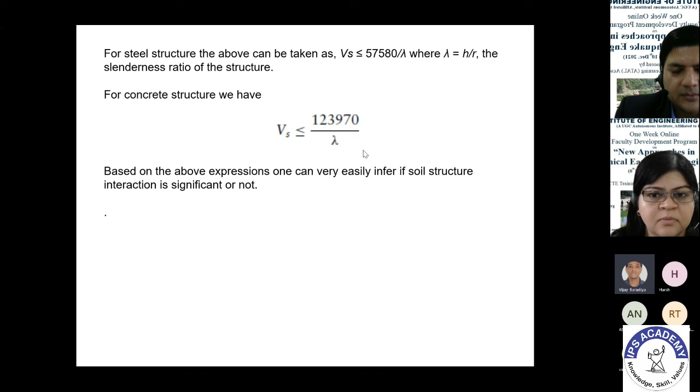So there's something about the soil models. Different soil models, and of course, their coupling to the superstructure. We do have various soil models for comprehensive dynamic soil-structure interaction analysis.

One approach is equivalent soil springs, which we consider connected with the foundations, and we model it as a beam element, plate, or shell. There's also FEM, two-dimensional models, and mixed FEM-BEM approaches that people have used recently, which is very popular.

For all these options, whether spring elements or otherwise connected to the superstructure, they remain the most popular model, especially when designing, because it's very simple and doesn't take much time to model. That's the reason why people use it.

In exceptional or very important cases, we can use FEM or BEM, but it is mostly restricted to two-dimensional analysis, not three-dimensional, as that makes the problem more complicated.

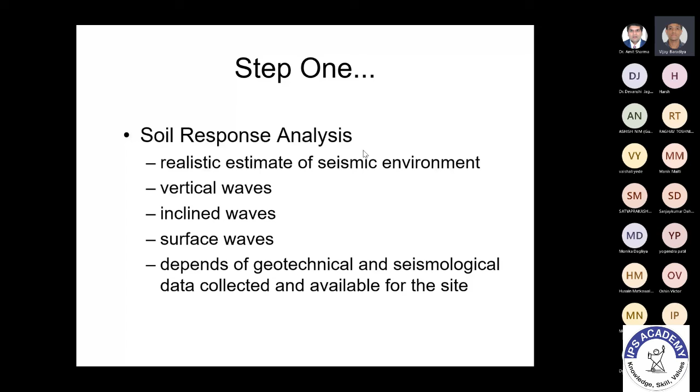So step one is to do the soil response analysis, a realistic estimation of the seismic environment, vertical inclined surface waves, depending on the geotechnical and seismological data for that particular site.

As I said, we consider the wave hitting vertically, but it may not be that way, it can hit from 30, 40 degrees, or whatever direction. Anyway, that's our assumption.

For the soil-pile-structure system, we can consider either a direct approach or a substructure approach. In the substructure approach, you first calculate the free field, then add your structure. Otherwise, you can model it as a complete system.

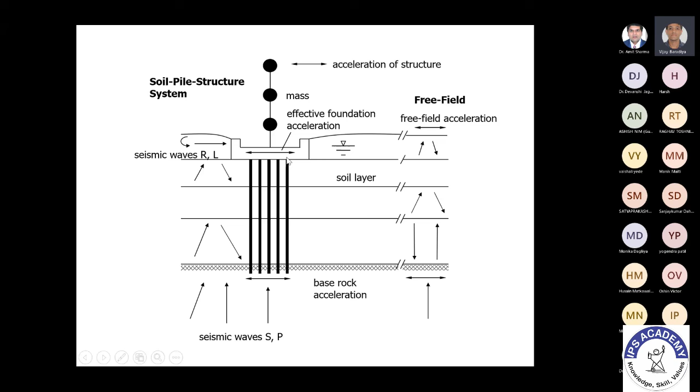Then the second step is to evaluate the pile response, the kinematic pile response—the response of the foundation ignoring inertial forces from the structure. So I don't consider anything from the superstructure, only the embedded foundation system.

Then we determine the oscillatory motion at the raft. This is for the pile raft, which I'll discuss more in our research part. In this system, the raft is mostly the load-bearing element, and the pile acts as a settlement reducer—that is the main advantage of the pile raft system.

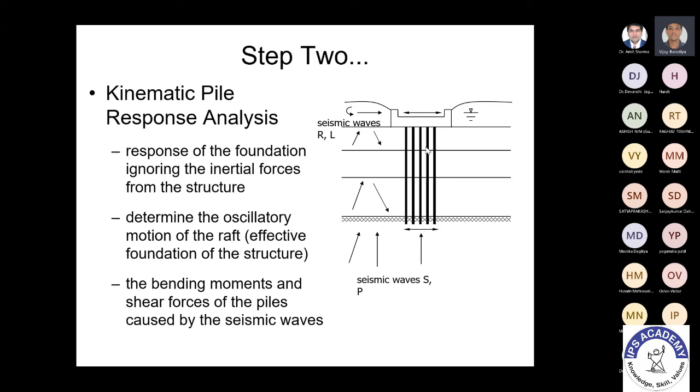The bending moment and shear forces of the piles due to seismic waves can be evaluated. Then in the third step, I can apply the inertial loads coming from the superstructure, along with the dynamic motion of the structure and the loads.

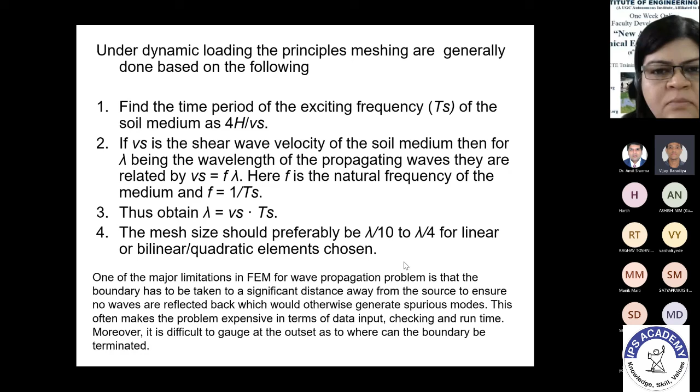To do all these things, first we need the principles of meshing. There are standard methods, but I won't go into detail on how to do meshing, since that may not be exactly related to ground response analysis.

From the geotechnical perspective, irrespective of whether we use springs or FEM to model the soil, the fundamental properties on which stiffness depends are the dynamic soil properties: shear wave velocity, shear modulus, Poisson's ratio, and the dynamic damping ratio. These are very important to quantify through either lab or field tests.

In spite of all these things, we still have some uncertainties to handle, and that comes with your judgment. There's a lot of judgment involved in geotechnical engineering—it's more about common sense rather than just mechanics.

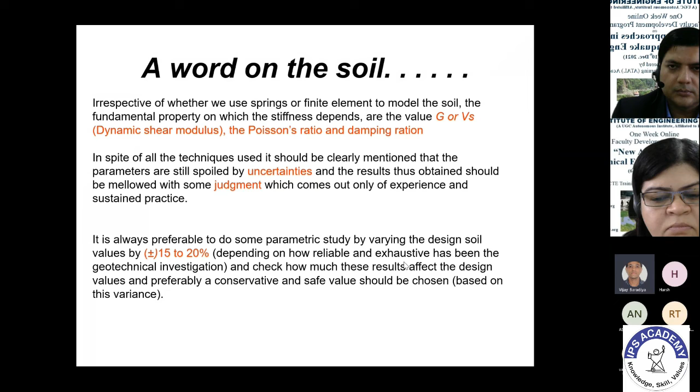It is also preferable to do a parametric study by varying different soil design properties. I'll explain this more tomorrow so you can understand it better.

With this, I conclude it's much better to do a little more analysis beforehand rather than be sorry at the end, because once the soil fails, the structure must fail too—no structure can fly or float. Okay, thank you so much.